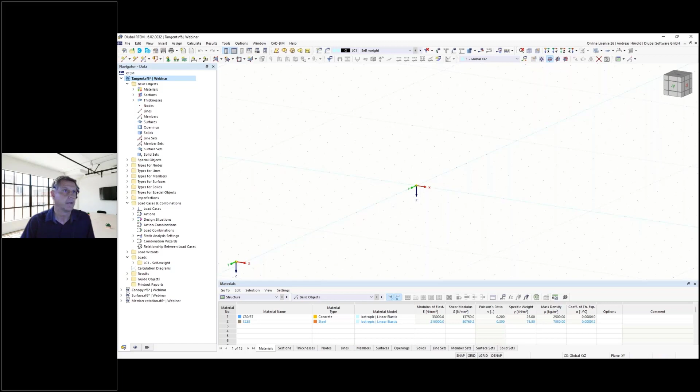Then we turn to the program, and I've got here an empty file. The first question is, how can I construct a perpendicular? I have to close my webcam so you can see the full screen. I think it's okay now. I read the question again: how can I construct a perpendicular connection to a line, and a tangent to an arc, in RFEM?

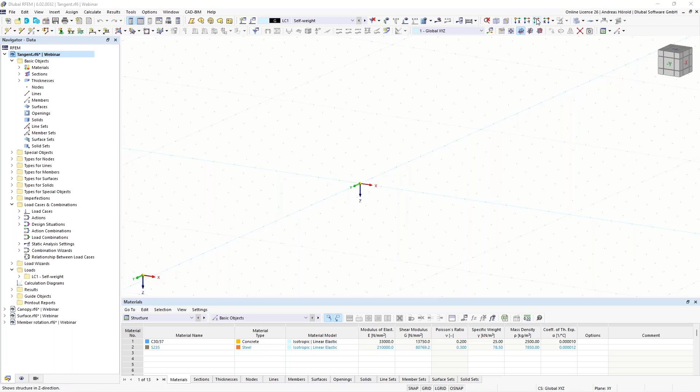I switch the view to Z direction and I enter some lines here, this one for example, and this one. If I want to create a new line from the middle, perpendicular to that one, I have to change the line size so it works better.

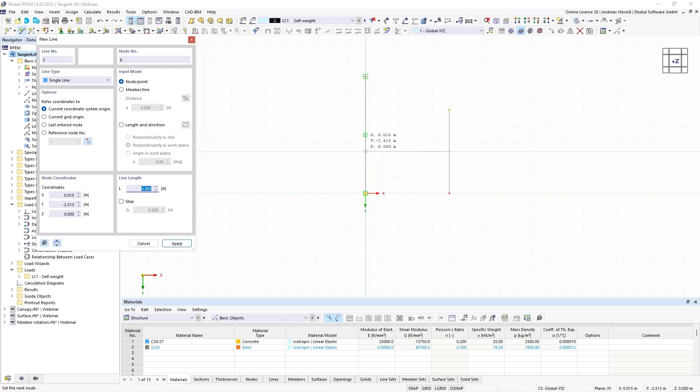Okay, then I'm not in the grid. The middle from this line and perpendicular to this line, and that doesn't work. It snaps the middle of the line, but I want to create a line perpendicular.

So another task is a tangent. I create a circle and want to draw a tangent here. And that doesn't work as well.

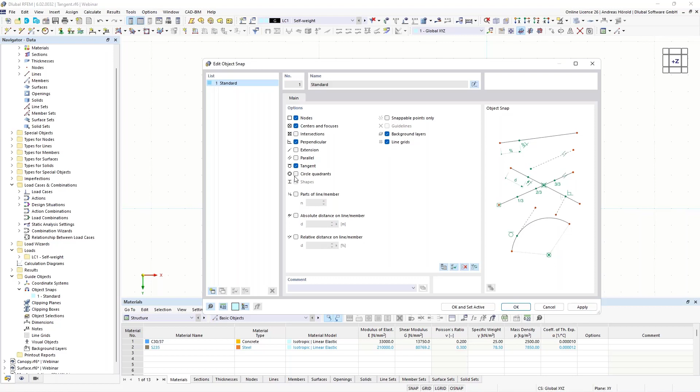That's why I open the guide objects in the navigator data on the left, the navigator data, then object snaps standard. The other possibility is to right-click on the object snap here and edit, and you turn to the same dialog, the standard setting for the object snap. If you check perpendicular, for example, tangent, and the circle quadrants, and press OK and set active, then it should work.

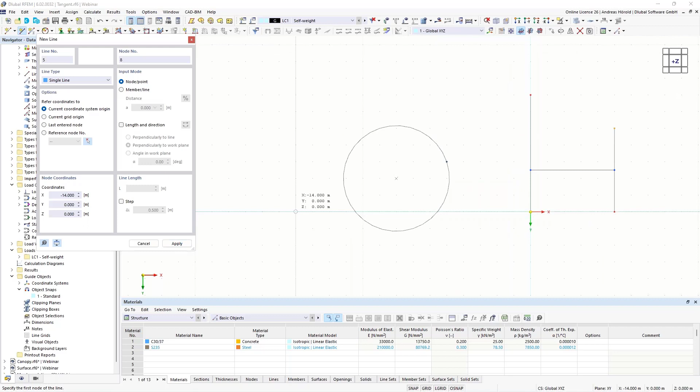So I create the line again from the middle, perpendicular to that line. That works. Now the tangent, I start here and can draw a tangent, and also a circle quadrant, so from here to here. So this also works. Okay, that's all for this question.

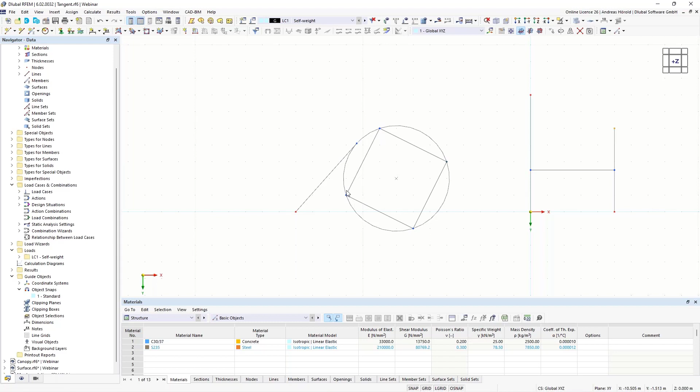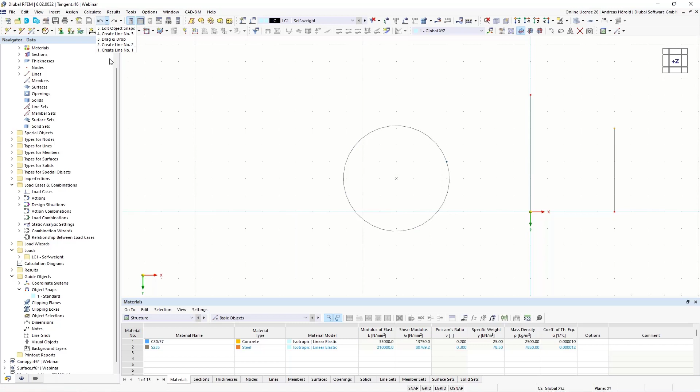The next question is, can I use the undo feature to select a specific editing date or state? Yeah, that's the undo button. It works as usual, and the redo button. But if you click on that arrow and open that drop-down menu, you can select or choose any state, the first state and the last state on that arrow.

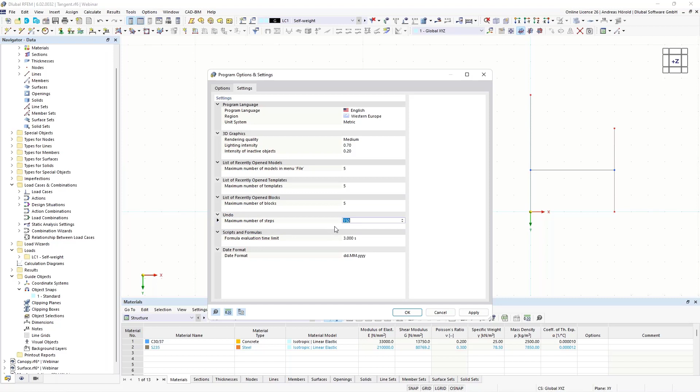Under the settings, here, options, program settings or program options, you can define the maximum number of steps for the undo feature. You can decrease or increase it as you want. The default setting is 100. Okay, that should be all to this question.

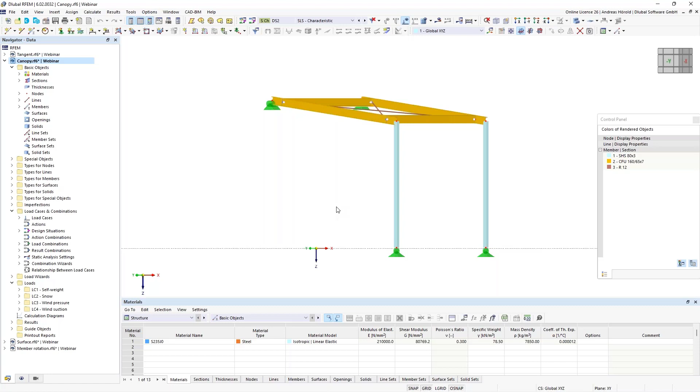I switch the model to a canopy. The question is: is it possible to create a user-defined coordinate system? You can see the current coordinate system, and if you want to move a coordinate system in the roof of the canopy, you can see the roof is inclined. I can show you how to create a user-defined coordinate system that is also inclined.

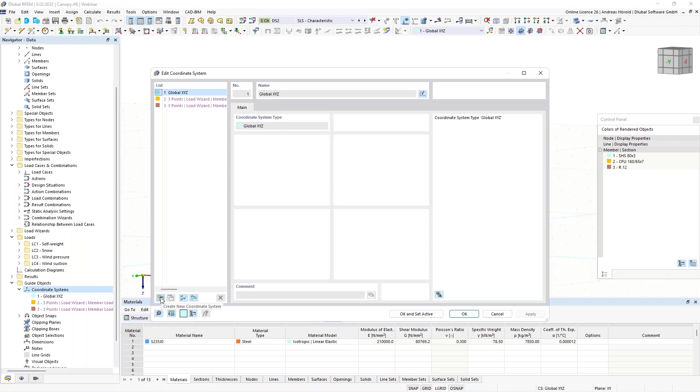So again, in the navigator data, you can find the coordinate systems. If I right-click, I can edit it and add a new coordinate system, and can do an offset, 3 points, 2 points and angle, point and 3 angles. I select 3 points, and I have to select the 3 points.

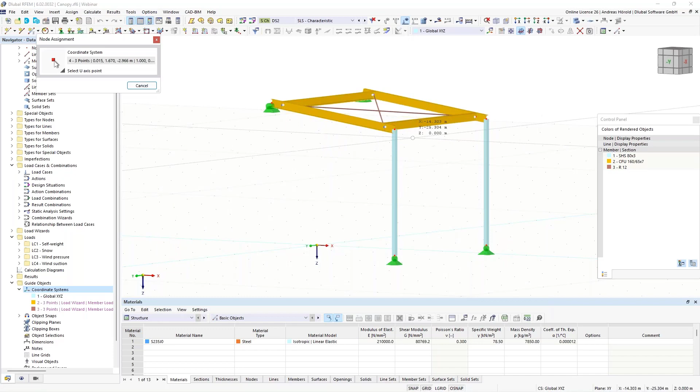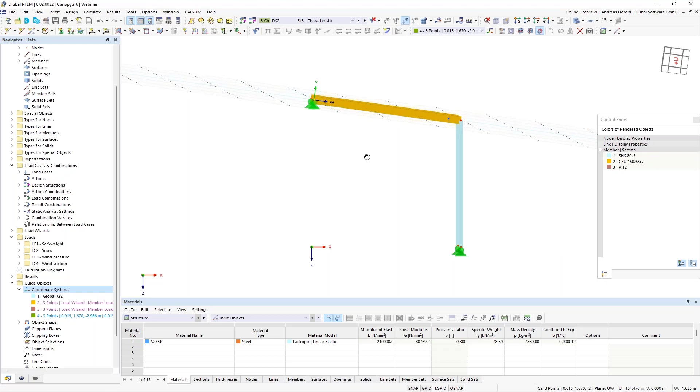Okay, and I apply it with OK and set active. So you can see the coordinate system is rotated, and I can switch the view, or change the work plane to UV, and now it's UVW. You can see now it lies in the plane of the roof.

And I can create a new member, for example, in that area, and also those members are inclined.

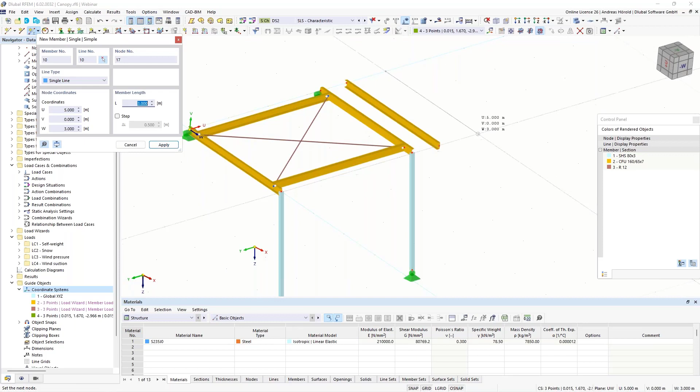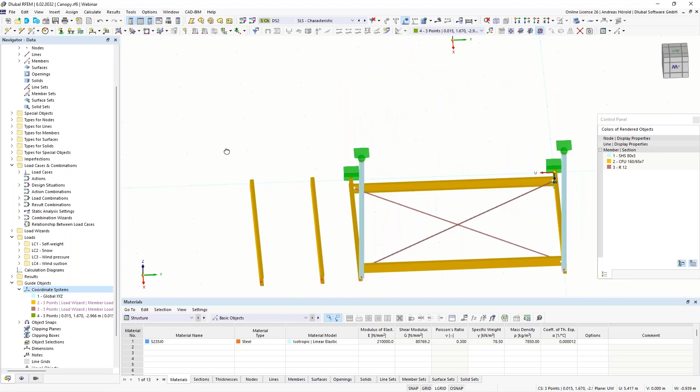And you can also use the view cube to change the views. Okay, so that should be all to that model.

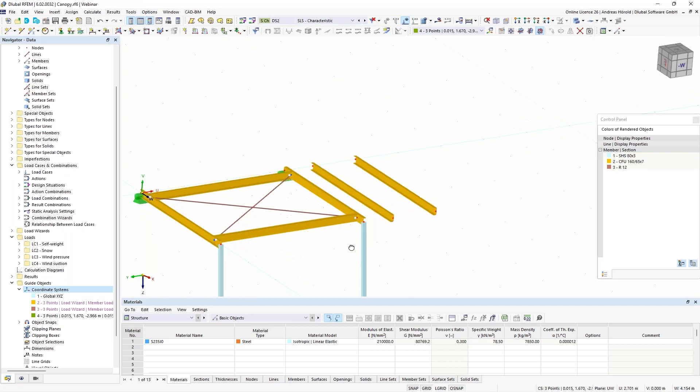The next question is, how can I modify the ultimate stresses for material for stress analysis? So let me delete two members, and I activate here, right above in the base data, the stress strain analysis.

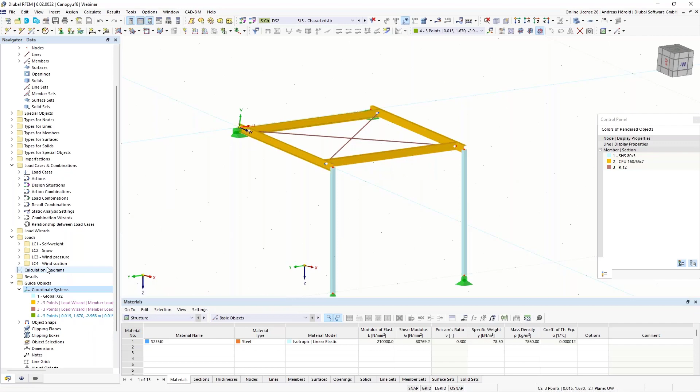The limit of stresses is to be configured in the member configurations for the stress strain calculation. You can do that in different ways. You can double click on such a member, or you can go in the navigator data. You can see the stress strain analysis is activated, and you can find the member configurations here. You can double click on default, or I double click on one member.

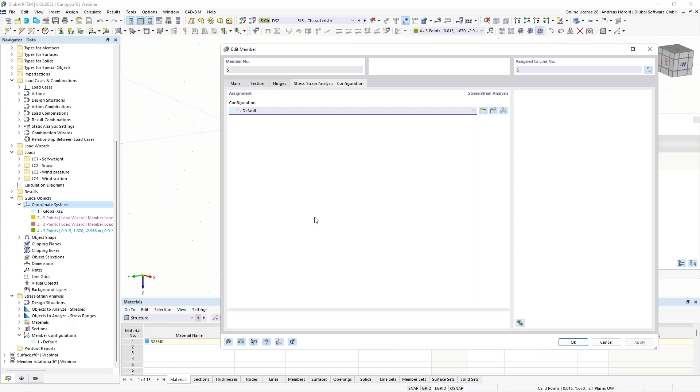Here is the dialog stress strain analysis configuration. You can see also the default configuration, it's the same as here at the bottom left. Okay, I can edit the member configurations.

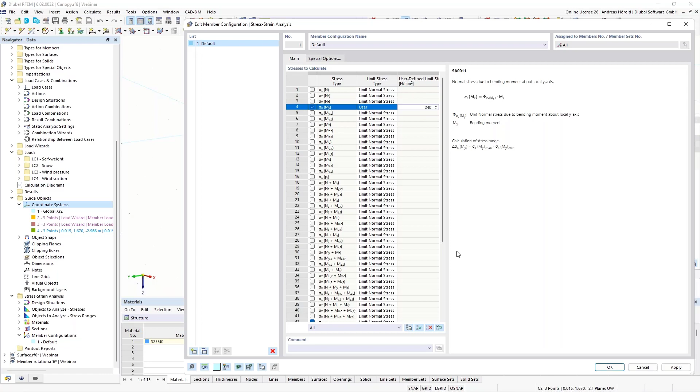For example, for the sigma x, I can create or define a user-defined limit stress, for example 240 Newton per square millimeters. Okay, I leave the dialog.

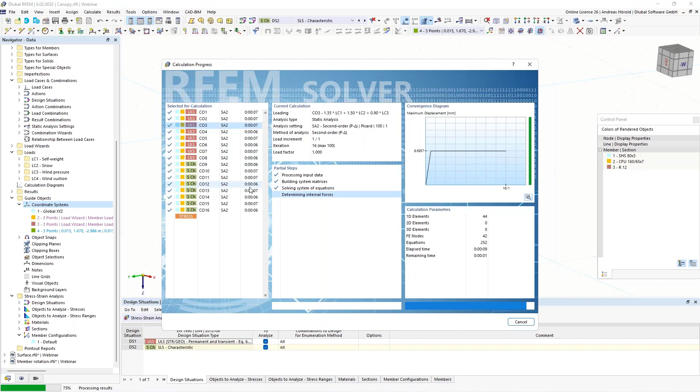Then in the table at the bottom, I select the stress strain analysis and calculate all. Now you can see the multi-core processing: they work in parallel, and you get a quite quick calculation. Let's take a look at the table. You can see my user-defined limit here, the 240 Newton per square millimeters, and the other limit stresses.

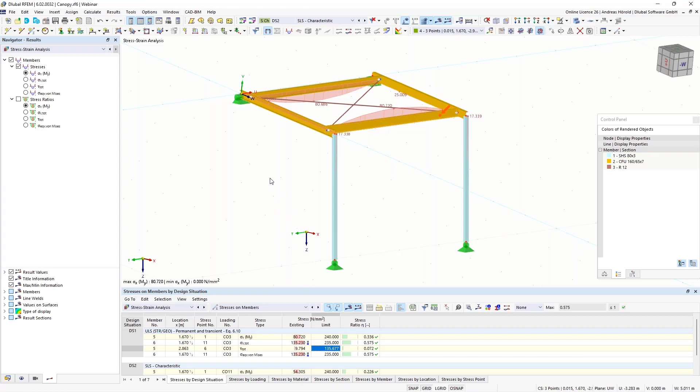Then we turn to the next question that we often got: why do I get an error message when I define a line support on members? Let's try that. I changed the model here. Just a moment, I delete the nodal supports.

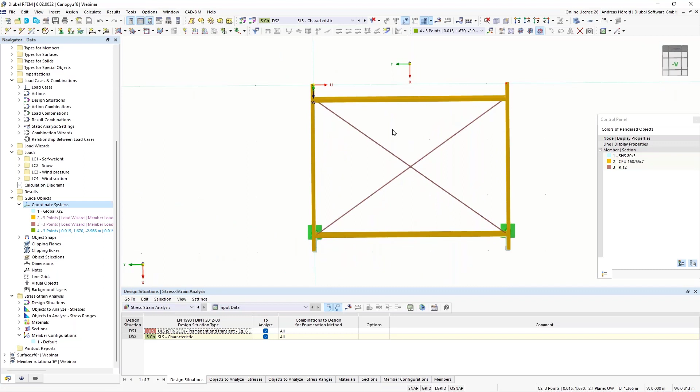I changed to the wireframe model, so the member and the bracings and that point.

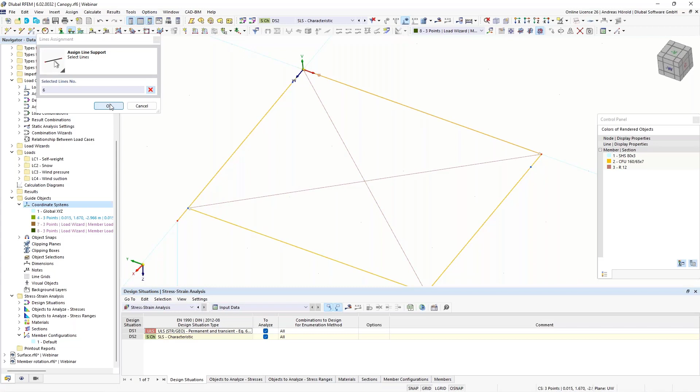And now I create a line support. Here, left above, assign line support on that line. And I define it in X, Y, and Z direction.

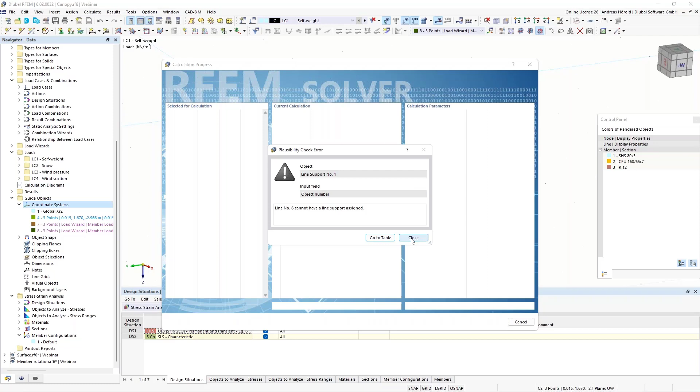And I calculate all, or I can only calculate the self-weight load case, and I should get an error message. That's the problem: line supports only work on lines that belong to a surface or solid, not on members. We have to find a different way, but we have a different way.

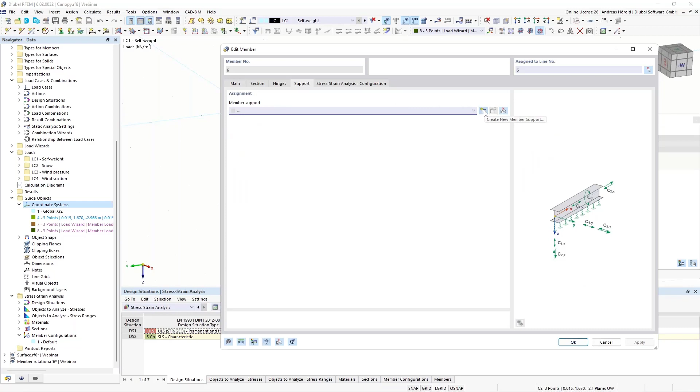I show you just a moment. I double click on the member, select support, and I create a member support. Create new member support. I check the X, Y, and Z direction again and calculate all. Okay, that works.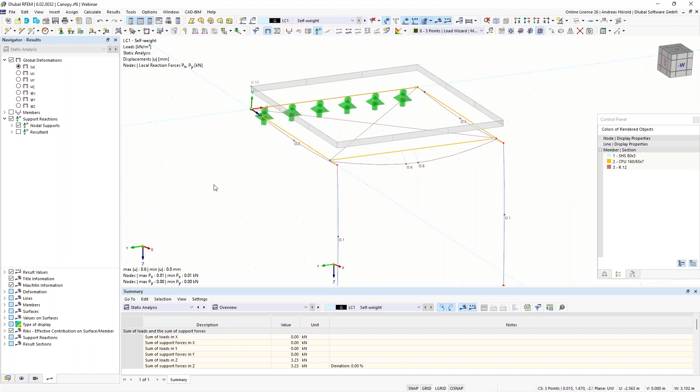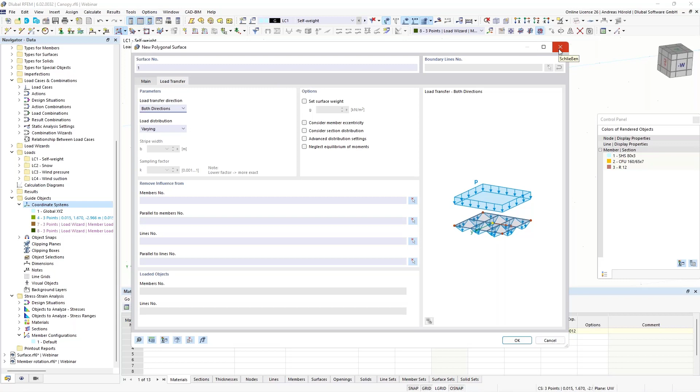Another possibility is to add a load transfer surface. Then you can also create a line support, as I said, line supports work on surface or solid. How to do that? I delete the member support and create a new surface with the stiffness type load transfer. It has got no stiffness, but you can enter loads on that surface, can define the direction, that the load transfers, the surface transfers the load to the edges, to the members, for example, or to the line supports on the edge. Okay, but that's not interesting in our model.

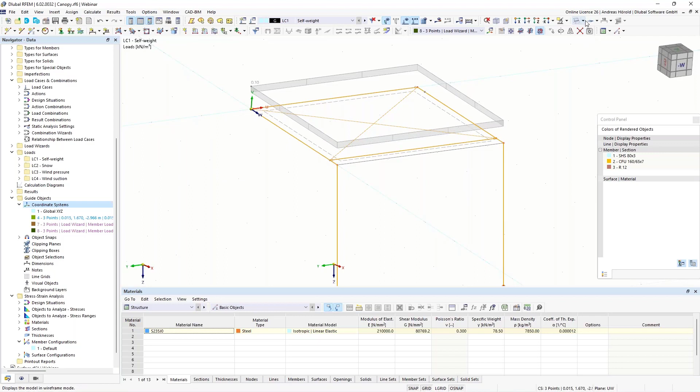You can see also as a load that I created before, and if you create a load transfer surface here, I can switch to the transparent model, for example, and now you can create a line support on that line.

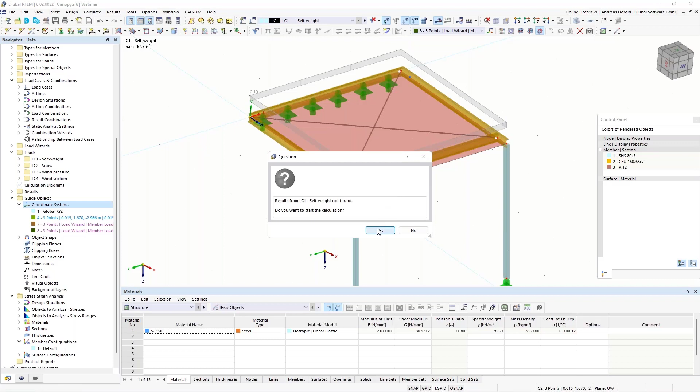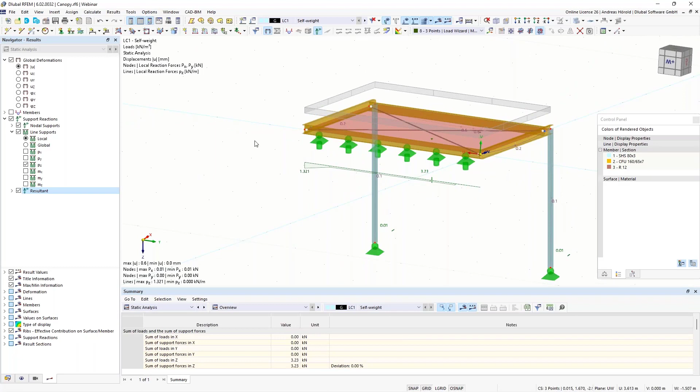And I calculate the self-weight load case again. Okay, that works. And you can see the reactions graphically, for example only in Z direction, and the resultant here in the middle. In that case, only for the self-weight load case, but it works for the other load cases and combinations as well.

So we turn to the next model and the next question. And the question is, can I divide a floor slab into several areas with different surface thicknesses without having to re-enter all surfaces? Yes, that's possible.

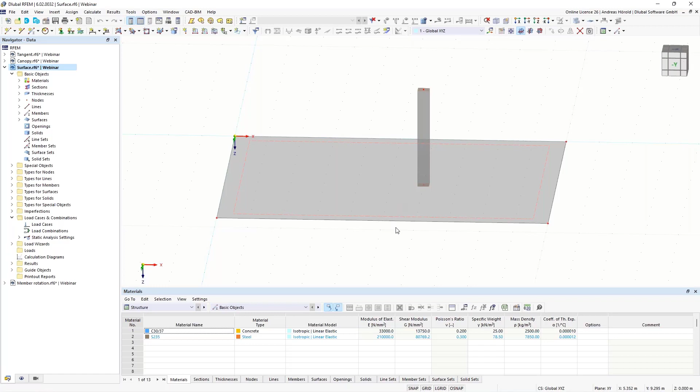We can use the function divide surface with intersection lines. At first, I create the new surface, or the edges of the surface. I switch to the top view. I didn't prepare any support for the surface, but imagine you calculated that floor slab, and under the column it would be better to have a thicker floor slab. So how to do that?

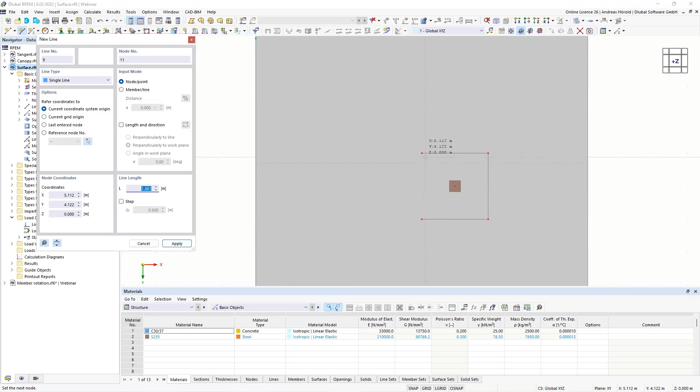I create new lines, so I use the grid. And now I right-click on the surface and use the function divide surface with intersection lines. And now we've got two surfaces, the smaller and the old surface.

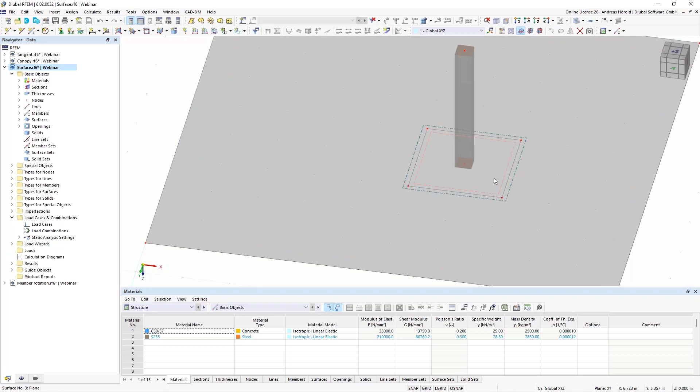So, and if I double-click on that surface, I can define a new thickness, e.g. 500 millimeters. Okay.

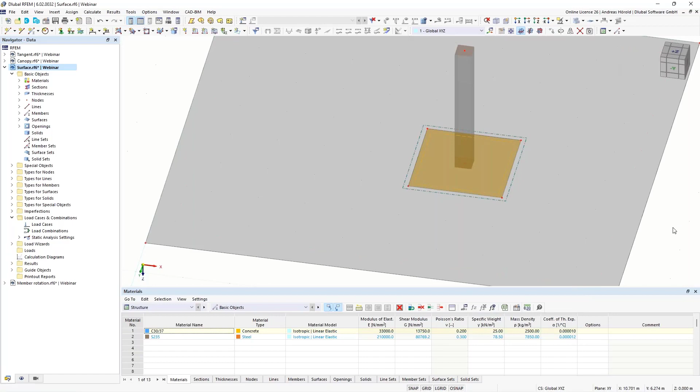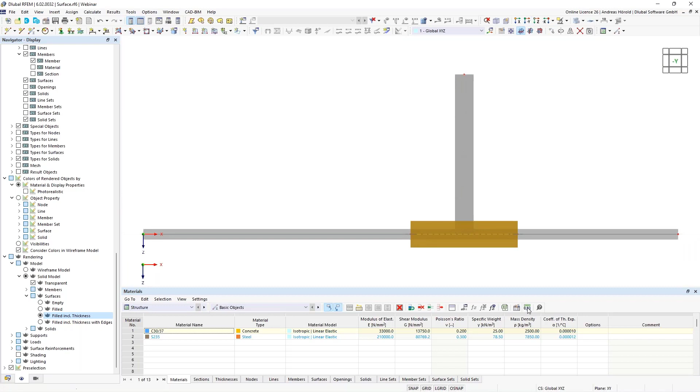Let me go into the navigator display and scroll down to rendering, solid model, surfaces, and then filled including thickness. You can see the thicker surface. If you want the upper side in the same area, you can double click on the surface and...

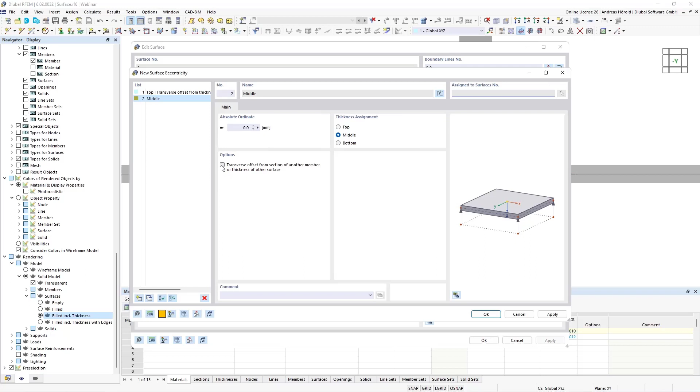Define an eccentricity. So I create a new surface eccentricity, and I use the option transverse offset from section of another member or thickness of other surface. That means if I create that and change anything later, any thickness, it will be modified automatically.

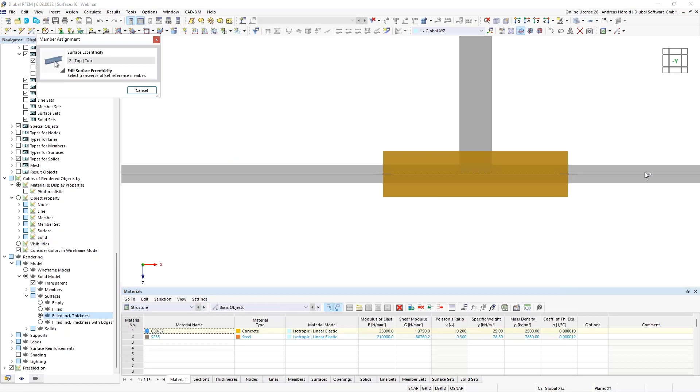So the thickness assignment is the top of the thicker plate should be on the same level as the top of that surface. I have to grab it. Okay, the object shouldn't be a member, it should be a surface. Now it should work.

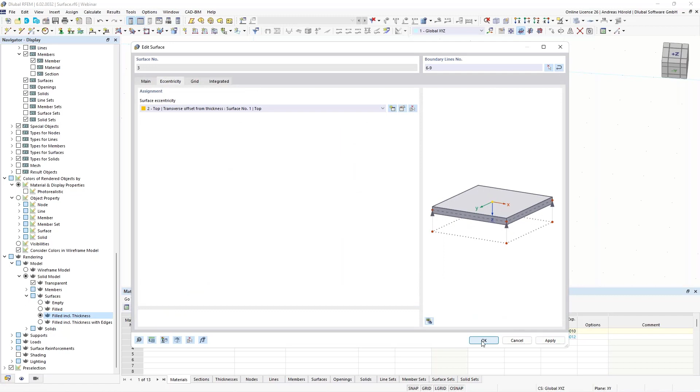Yep, that works. The floor slab is now thicker under the column. Okay, then we turn to the next model and the next question.

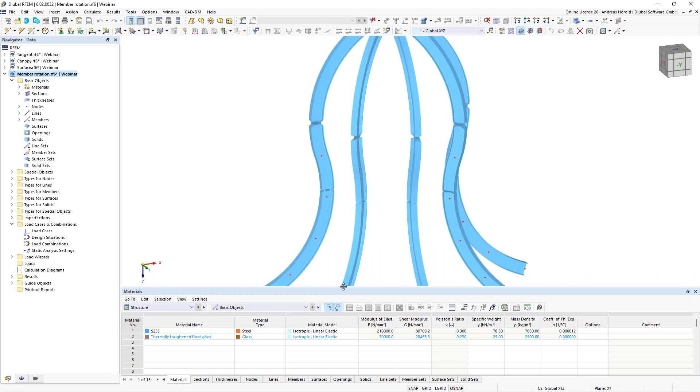The next question is, in my model with many beam members, the coordinate systems of the members are not evenly aligned. What can I do to improve this?

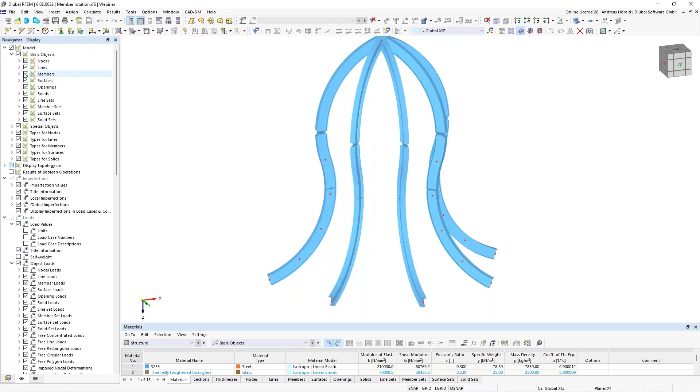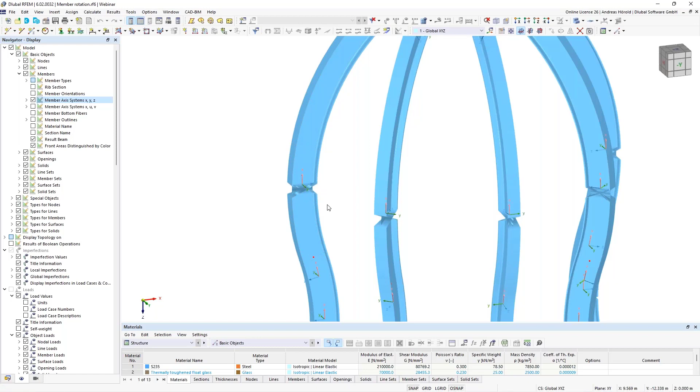I changed to the navigator display, and under members, you can activate the member axis systems, and you can see, for example, the Z direction of the member is in that direction and here in that direction. On the transition, it's constricted, but we can easily align that with, for example, a help node.

First, I create a help node here, left above, a new node between two nodes. I select the first node, then the second node, and apply that with enter, and you can see the help node here.

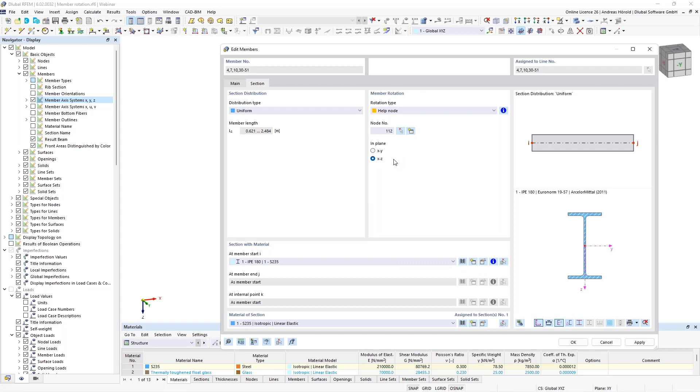Then I select all members, double click on one member, and define here under member rotation the help node, Z axis, and I select the node and apply that. Okay, that worked fine. Now you can see all is okay.

Then we turn to the last question. Is the import from Microsoft Excel still available in RFEM 6 and RSTAB 9? At first, I show you the export file, export, and where are the tables, Excel tables, but the import is not yet available.

At the moment, we will implement that, but for now you have to install an add-in. So let me show you how to do that. Just a moment.

So I can show you the website. Under support and learning, you find the FAQs. For example, if you enter Excel here, and scroll a little bit down, it's the same question that I read. So, if you click on more, you can see that you have to search this folder, and I copy that.

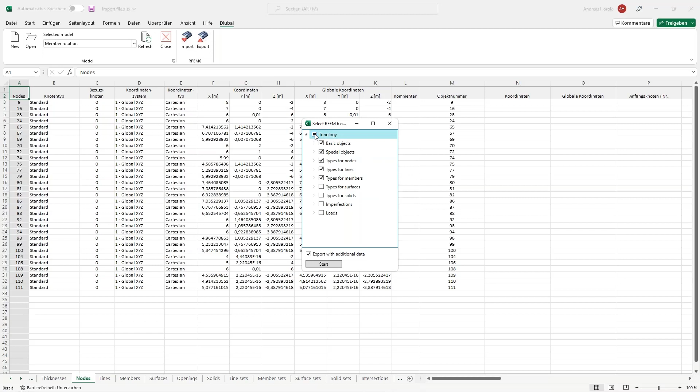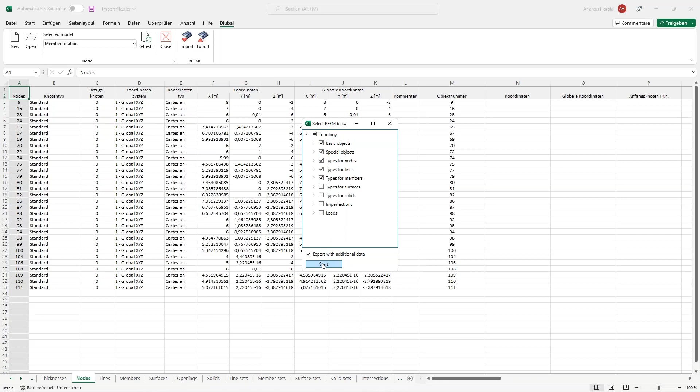And turn back to the model. Before the webinar, I exported the original file to Excel, and now I will import it back. So I go to Excel and press export. For example, the topology, then without loads, imperfections, solids, and surfaces. The rest is okay. I press the start button, and if we go back to RFEM 6, you can see the original model is being created.

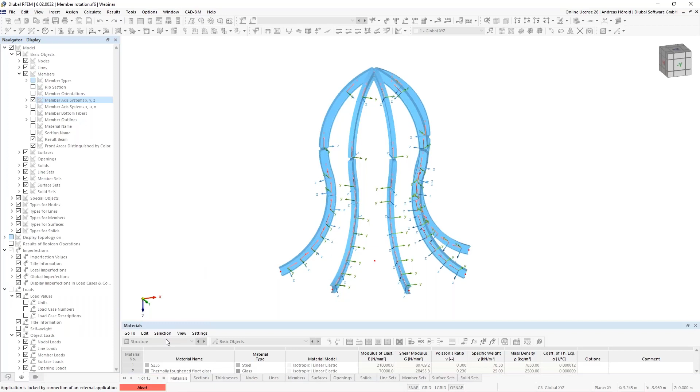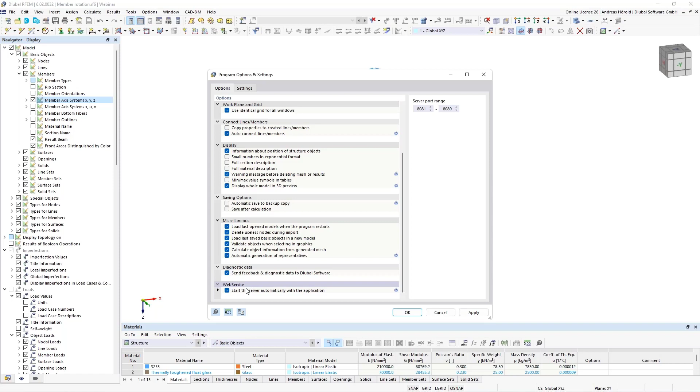Okay, that's the original model. So we can stop that. The default setting under options and program options is activated by default, but maybe by accident you uncheck that. But that is necessary for the add-in, for the Excel add-in, and for the web service as well, of course.

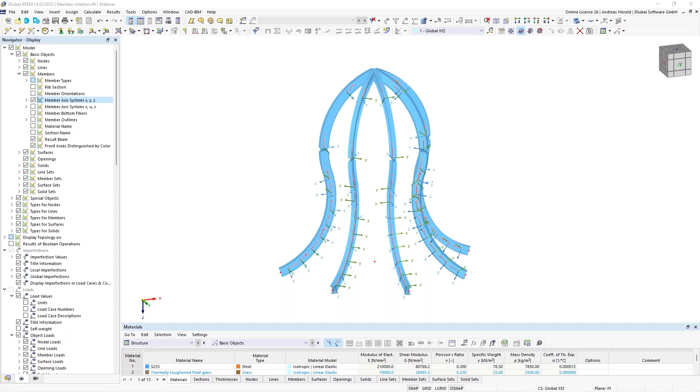Okay, that should be all. That was the last question. Maybe I'll turn back to the website so I can show you where to find the recording. We recorded the webinar, and on dlubal.com under news and events, you can find the webinars.